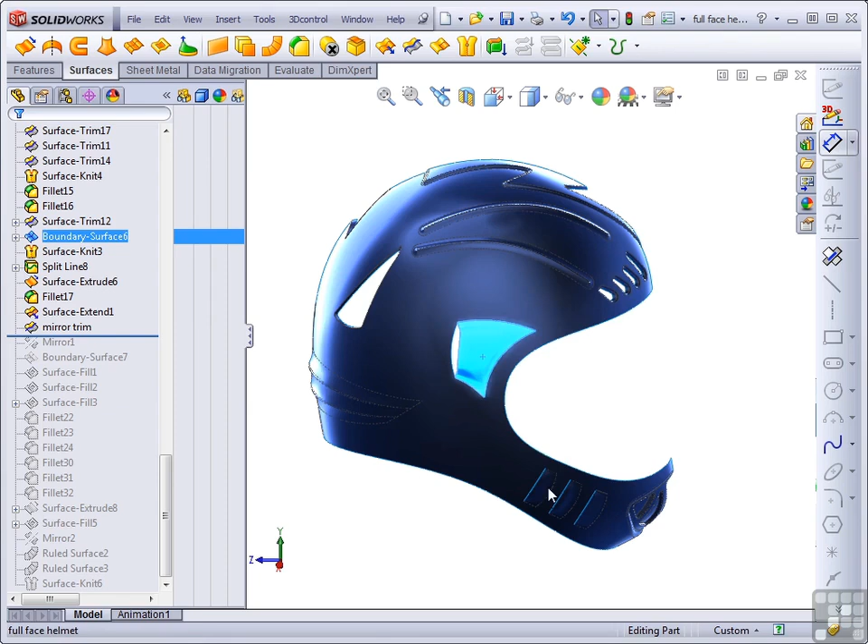In this lesson, we're going to add some finishing touches and mirror the helmet. We've gone ahead and added another vent to the side of the helmet that was created much in the same way that the jaw vents were created. We've also added some vents to the front of the helmet that used the extruded surface technique with the split line that we've shown several times. So what remains is to mirror the helmet and add some finishing touches.

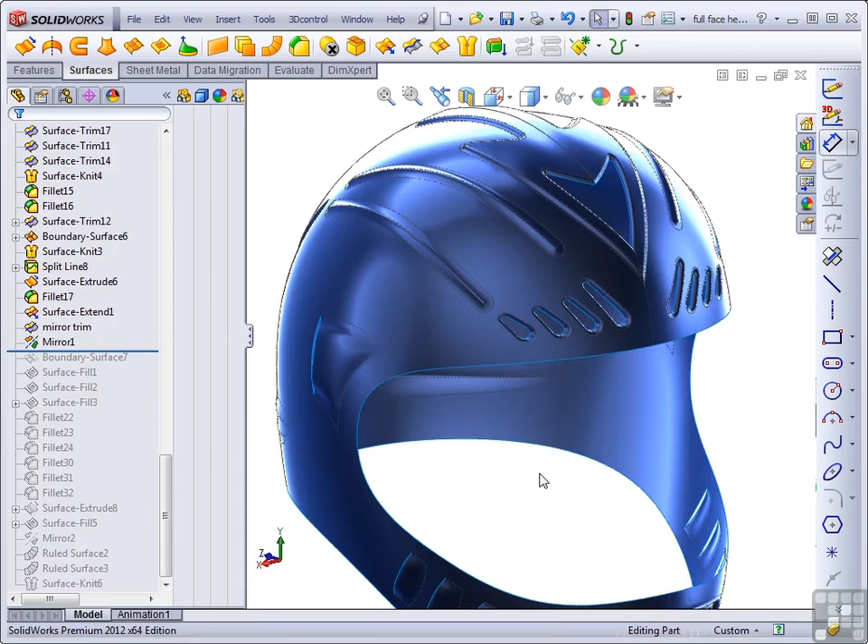The next feature that we're going to roll back is the mirror. And in this case, rather than mirroring individual features, we are mirroring the entire body. This should be faster than just mirroring individual features. There is an option, remember, in the mirror bodies feature that allows you to knit surfaces. Now, if surfaces start out unknitted, then those surfaces will not be knitted because of this option.

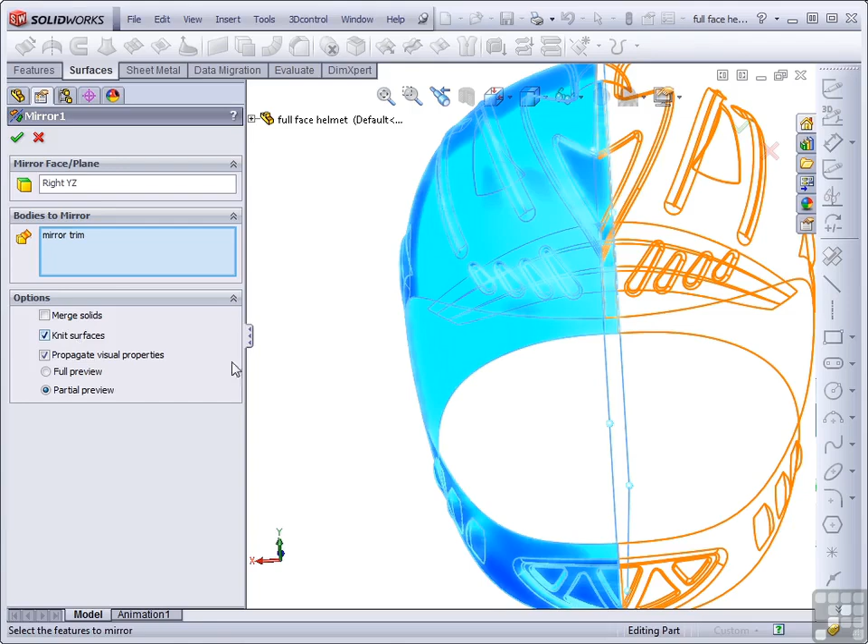But if a mirrored surface body touches the original, then those two bodies will be knit together. And the two halves of this helmet meet that requirement so that they will be knit together by the mirror feature. We can confirm that by going up to the folder for surface bodies, and we have just a single surface body after the mirror feature.

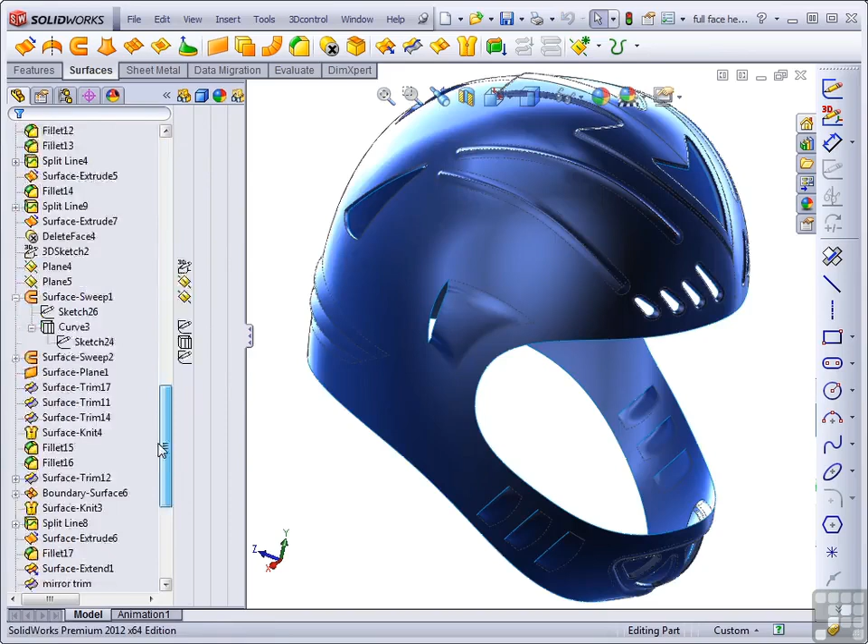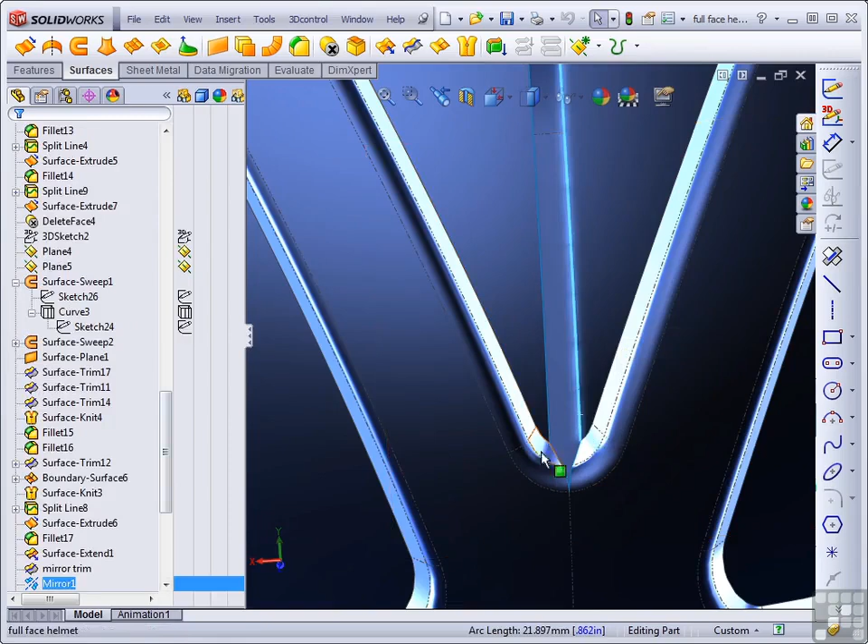Remember that we have some small cosmetic issues to clean up, such as this gap in the mouth vent. This is going to be fixed in 3 steps. The first will be a boundary surface that goes from one to the other using curvature continuous setting on both sides. And the second will be a fill surface used to fill up this 3-sided gap. Let's take a look at how this was done.

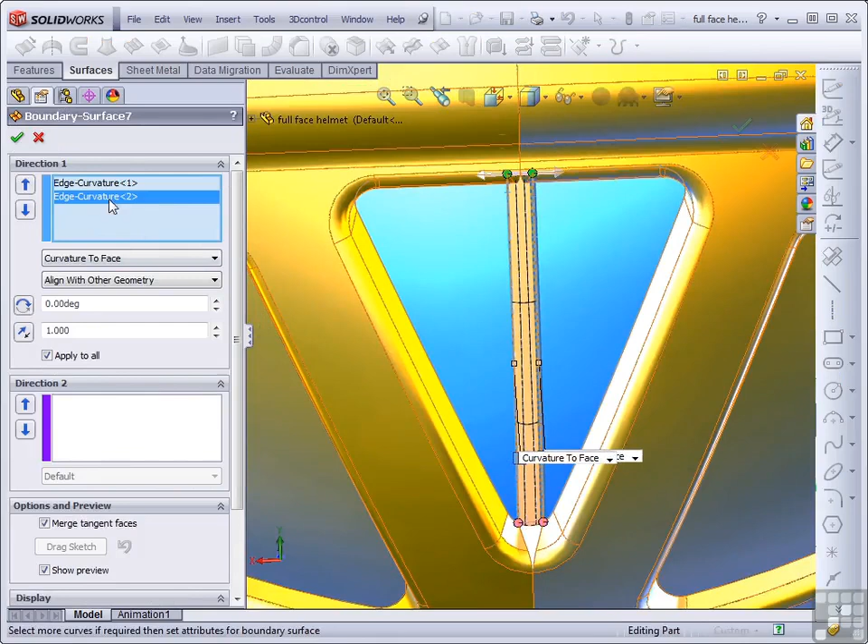I'll roll back the boundary surface, edit the definition, and we see that the 2 edges have been selected with curvature setting on each. This makes sure that the transition across this gap is as smooth as possible. To fill in the gap, we're going to use the surface fill feature.

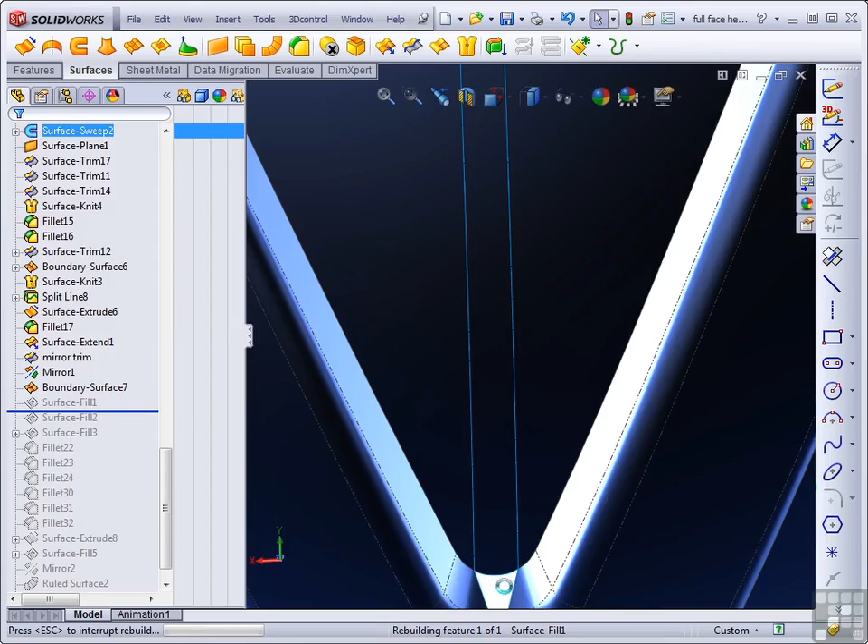Now remember that SolidWorks surfaces want to be 4-sided, and most of our faces here have met that requirement. But this gap that we've got is definitely 3-sided, and one corner of it is very sharp and pointy. This is generally a recipe for a big problem. So let's take a look at how the other one was done. The surface fill, if we roll this back, it's done this way. Select filled surface from the surfaces toolbar.

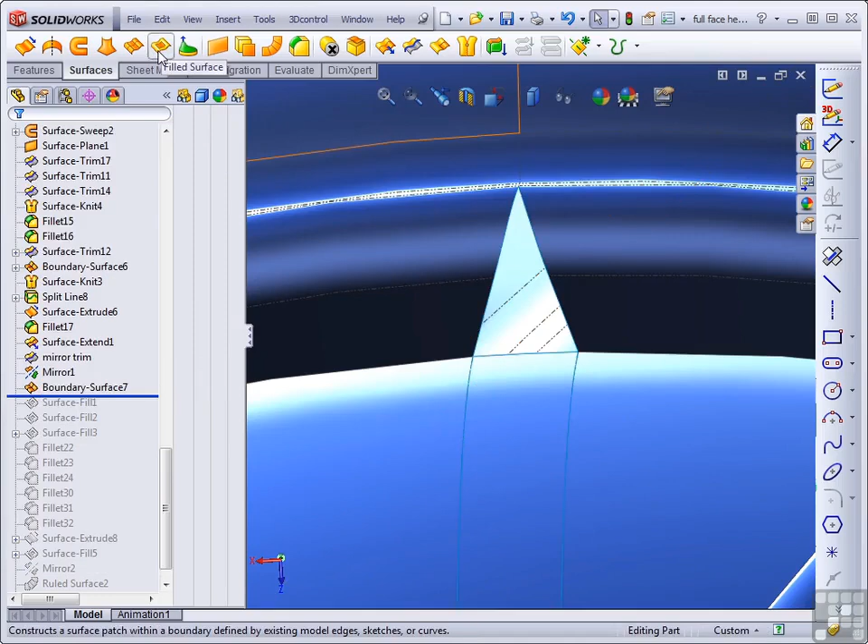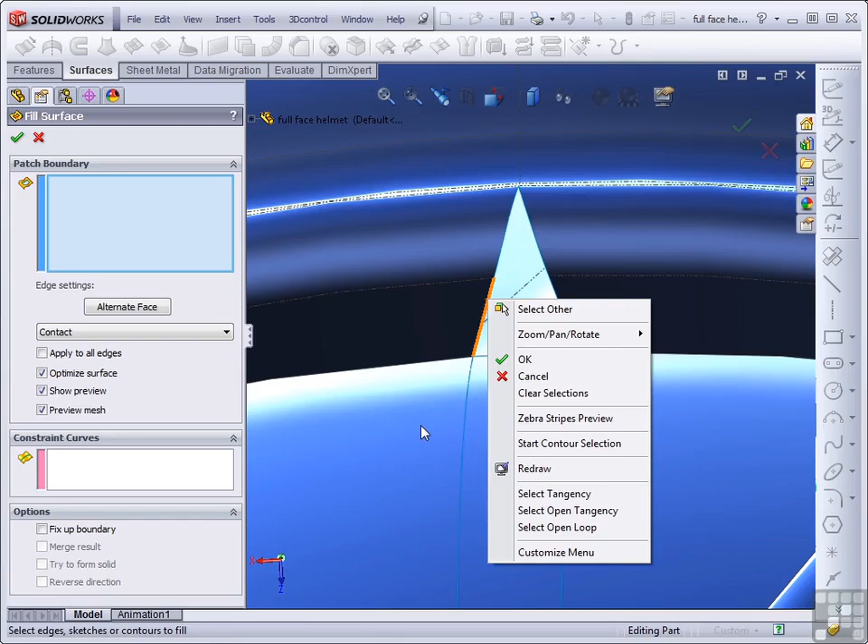And if all of these surfaces were knit together around here, we'd be able to just right click and say select open loop. But I can see from the light blue edges that we have open surfaces, which means that the boundary surface and the main surface are not knit together. So I'm going to have to select these manually. Let's go ahead, click on these.

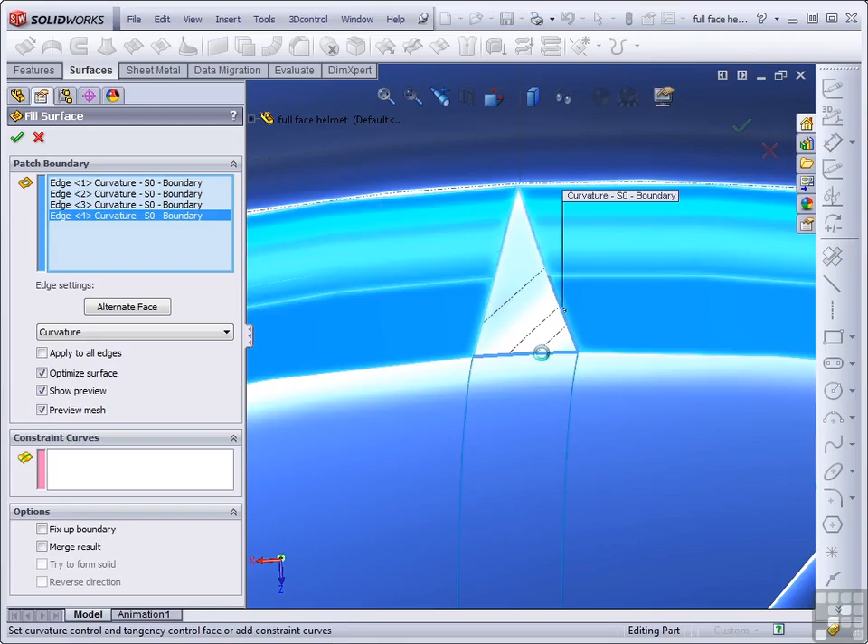It's a good idea to set these to curvature right away. If you've got one set to curvature, the next one you select is automatically set to curvature. Now, this last one, we don't want set to curvature continuous. This one just needs to be contact. So when we select it, it's fine.

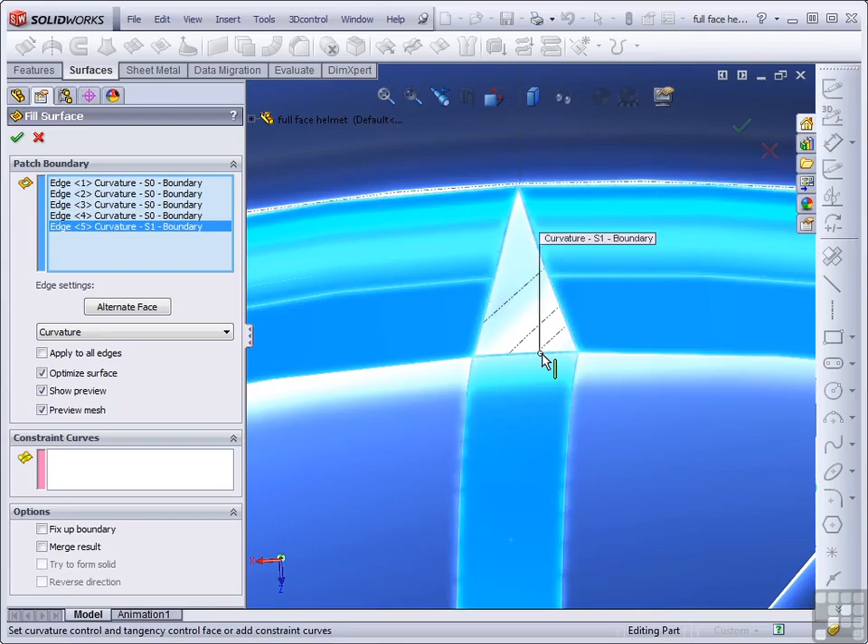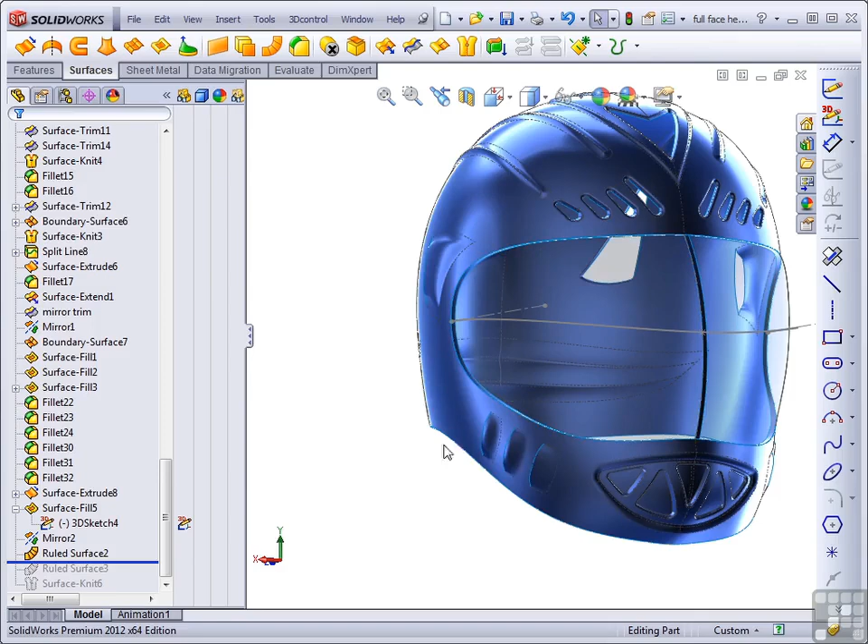And that does give us the curvature that we need through the middle of the face shield. I click OK on that. The face shield is created with a nice shape, and that needs to be mirrored. But then we need to create also an inset area around the opening for the face shield to seat into. And this is a great use for the ruled surface feature. I'm going to roll it back and turn off the face shield and turn off this reference surface.

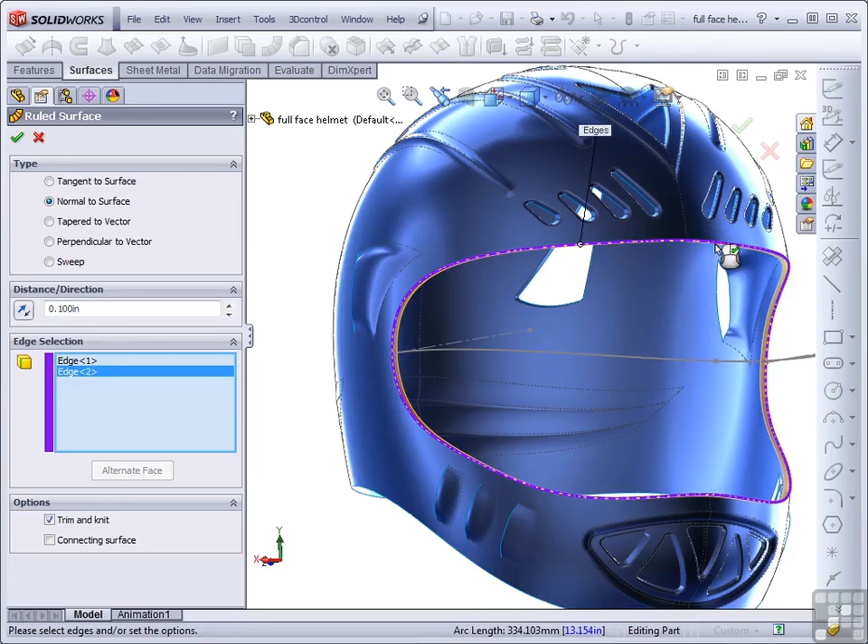To create a seat around the face shield, I'm going to use the ruled surface. Normal to surface, distance of 0.1 inch. I'm going to select the edges around the opening, and you can see that SolidWorks is creating a small surface ledge that goes all the way around the opening. We're just going to do this twice.

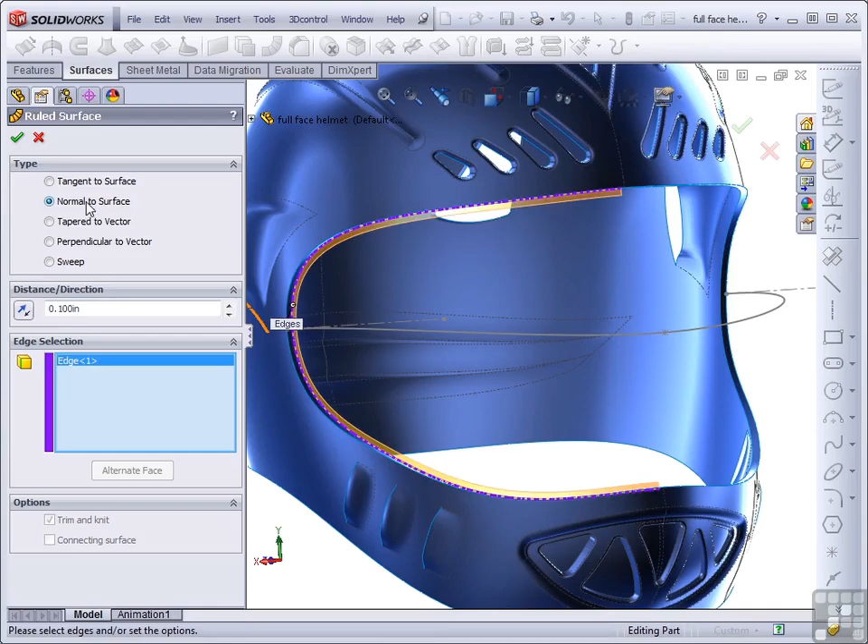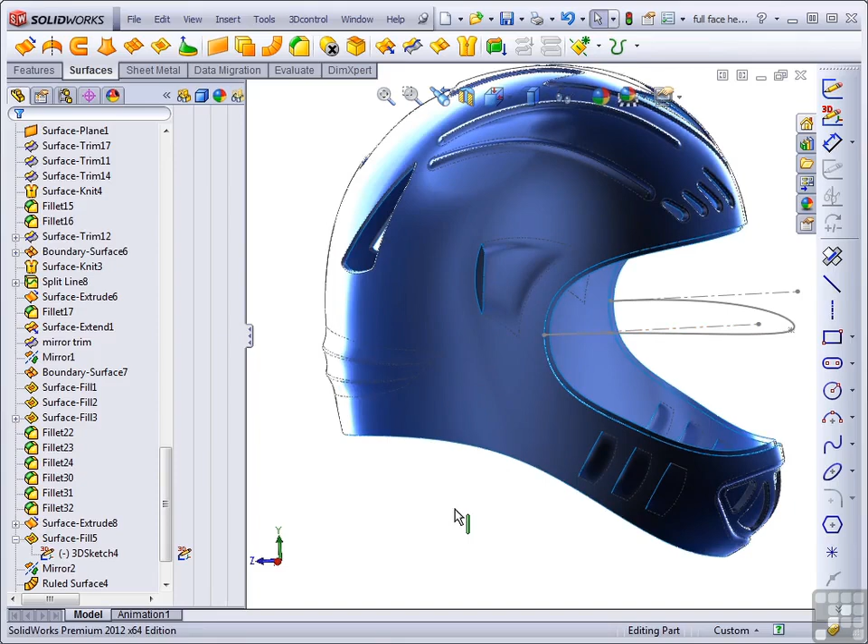Another ruled surface, and now select the edges of the surface that we just created using the same settings, normal to surface and 0.1 inch. And you see we've created a bit of an inset lip for the face shield to be seated into. Hope you've enjoyed this lesson on creating a full face helmet. It has a lot of take-home information on surfacing and the details of how you get it done.